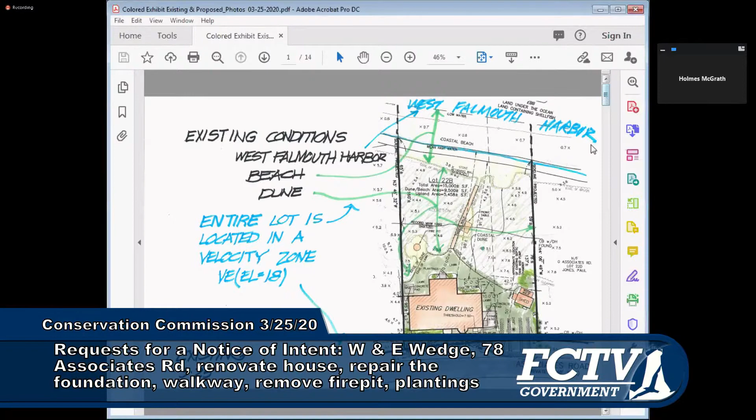There's an existing shed located on the north side of the lot. I'm sorry, we should have put a north arrow, but so be it. The next exhibit shows the activities that are going to occur on the lot, so I'm going to start describing them from the top down.

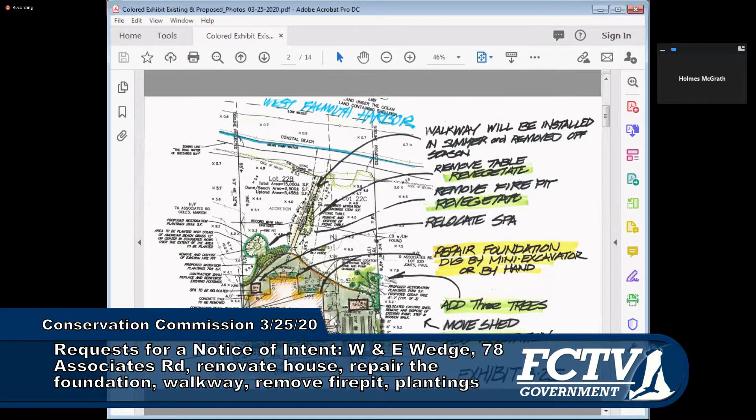There's an existing walkway made out of wood that basically goes from the lawn out to the dune. It's currently installed and stays there, but we're going to change it so it's installed in the summer and removed in the off season, stored on the upland. There's also unauthorized clearing at about this location, and there's a picnic table there, which we're going to remove, revegetating this with dune grass. This plan also shows in dotted lines an as-built from a previous activity, the outline of the path that existed at that time.

Since it's actually filled in on this side, and like I said, there's a picnic table here, so we're going to remove it and revegetate. Then on the other side of the lot, there's a fire pit installed in dune vegetation that's been cleared, so we're going to remove and dispose of the fire pit and revegetate in this area.

There's also a spa that we're basically going to relocate so that it's on top of existing lawn. We're going to construct a work limit on this orange line that goes all the way around to here, and there's going to be revegetation in this area — dune grass here, and a buffer series of vegetation in this location.

On the north side of the lot, there's an existing shed located in this position. We're going to rotate and move the shed, then replant or revegetate this area that I'm showing with the cursor. We're also going to add 3 trees, shown as the heavy dots.

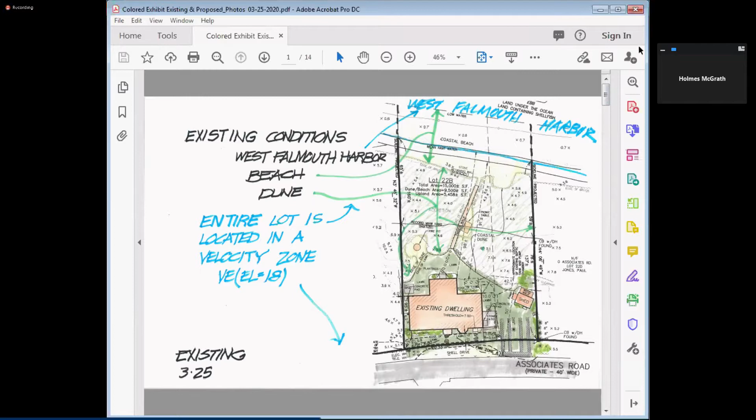Thank you. I guess the only thing is probably mark on your drawing where the tree is going to be moved to. Other than that, I think it looks great. I think you're doing a good remediation of this property. Okay.

Maury? Okay, can you hear me? Yes. Okay. The mini excavator, I like that idea, that it's going to be something small and or by hand, because there's not a lot of room back there.

But I did have a couple concerns that they haven't really spoken about, the picket fence and the stockade fence that are all new in a V zone. I just want to know, I know they weren't there before when the septic was put in, whether we are all okay with that much in a V zone or not. Usually we don't allow that.

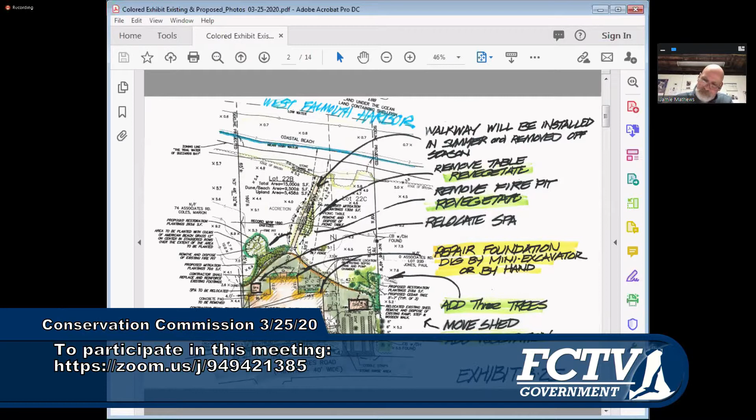Betsy Gladfelter, aye. Courtney Bird, aye. Matthews, aye. Mark Gurney, aye. Maury, Carlo Hawks, aye. Peter Walsh, aye. Russ Robbins, aye. Steve Patton, aye. All right, the hearing is closed. Thank you, Michael. Thank you.

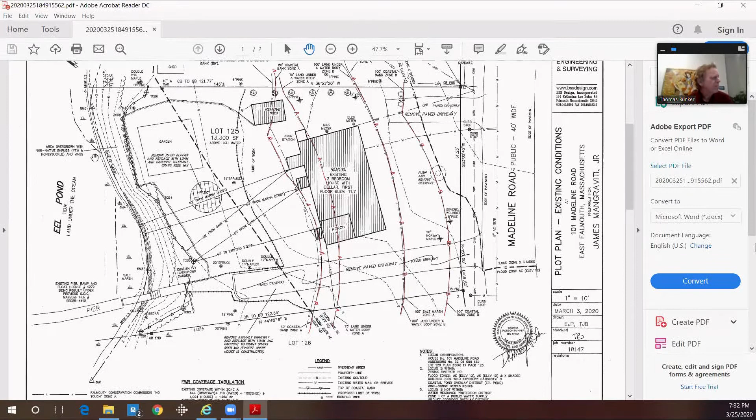There's some fronting salt marsh along here and a fairly steep bank running up to about elevation 7 or so. From there back to the house, about 50 feet, is a lawn area with a garden and patio. Within that 50 feet, fairly close, is a paved driveway that runs from Madeline Road all the way down the hill to fairly close to the top of the coastal bank. There's about 20 feet to the top of the bank. There's also a pier—if you went out there, you'd see some work being done on it, previously permitted under an earlier DEP file number.

I've highlighted the Zone A lines of the coastal bank. The first one is 50 feet out, and then there's 75 feet, land under water body Zone A. Landward of the house is the Zone A, 100 feet from the salt marsh. Further inland, the furthest reach is the Zone B of the coastal bank, which reaches almost to the road, as you can see. The flood zone is this heavy dash line crossing Madeline Road.

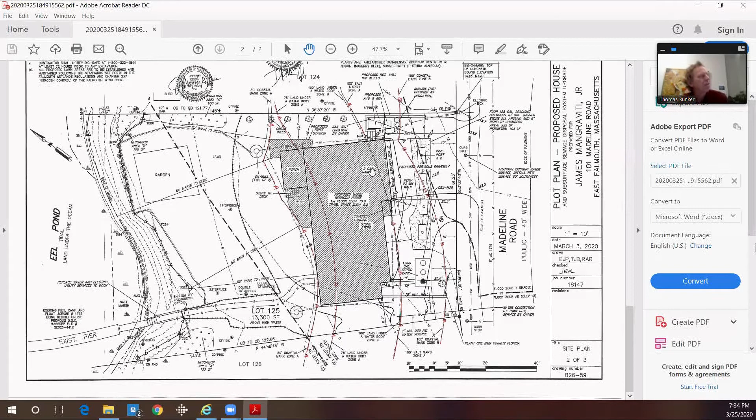The proposal is to take that house down, as I explained, and put up a new house, which is here relative to the Zone A of the coastal bank. I had drawn in what I called the C line. The A line is the Zone A, and the B line is the Zone B, but the C line is a compilation of the A line and how close the house is from the resource areas. This C line is what I figured was the closest any part of the structure could be to the resource area, and so I did not take the shed into account on that line.

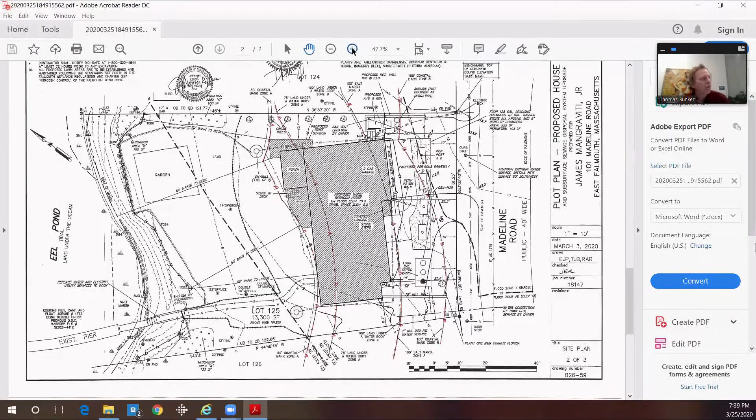All of the roof runoff will be contained in dry wells. We have this roof drain line from the front. The dry wells have to be in the back because they have to be 25 feet minimum from the septic system, so we put them down here. The soil is quite sandy, so the dry wells will be quite effective.

I can show you a couple of pictures.

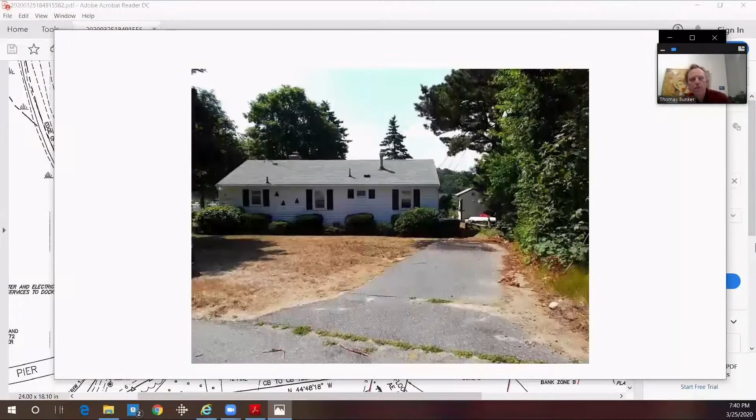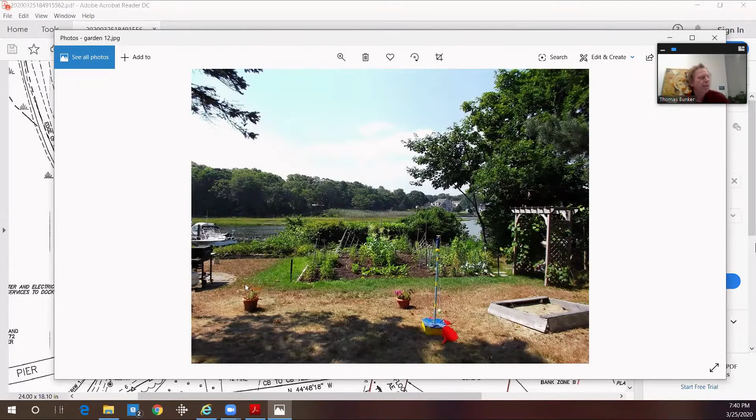Just to go through a couple—that's the front of that. These pictures were taken a while ago, just to show historically how it's been. This is the garden they have now, and you can see it's not a lush green lawn that they tend in the summer, but there is irrigation in the garden.

In your staff report, there was a comment about this arbor that's here. I didn't feel at the time it was important to put on the plan because it's not being moved. You can see some stepping stones near the arbor that go around the garden, and the patio, which is being removed.

And this is the arbor. You can see it as it is now, and the stepping stones.

I'll put this up as a suggestion for how we can change the mitigation planting. This is the area that was originally called A—no, this would be up in the northwest corner. Previously, some mitigation planting went further back inland. So what we will offer to do now is bring that all closer to the bank. If I can get back to the photos.

So this mitigation plan, we hadn't proposed it here before. We see this lawn area and the stepping stones. In this area, you can see the daylilies are starting to come up. This will all be mitigation planting, the lawn area behind the arbor and up through here. This will be maintained as a garden, so they can walk around or step through it. But this area up to this wood edge will be mitigation planting, so it would not look like this, where these green dots are.

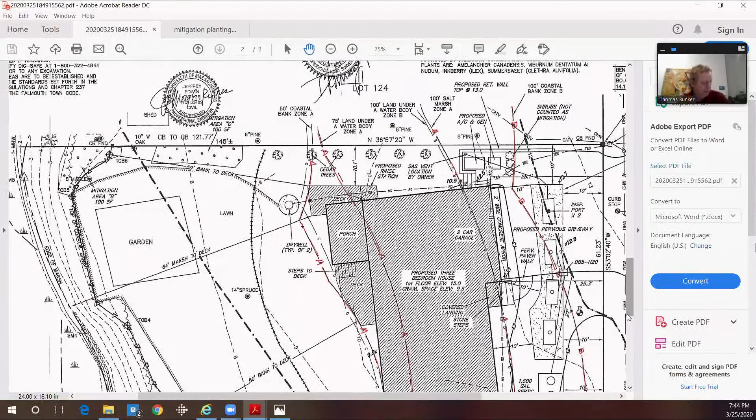That is what they're proposing, what we've drawn, and I'll take questions and comments. Thank you, Tom. Jen?

Yes, Mr. Chairman. Tom, that first comment, if you look at where you have TCB4 and TCB3 near the dock - the railroad, oh wait, maybe the railroad ties are over by the garden area. Because it looked like one part of that bank had no vegetation right to the top of the bank. So instead of relocating all the mitigation to that back corner, possibly put some vegetation along that bank to stabilize it and try to fight off the poison ivy.

It looks like it's lawn right to the top of that bank, and the mitigation regulations are to enhance the resource areas, not smush all of the mitigation, for lack of a better term, into these corners of the lot. We've been seeing this a lot more lately. Not impressed with the fragmented areas of mitigation, and it's just so that it's not along the top of that bank. I just feel the mitigation would be better off where you almost have like TCB4 through TCB3.

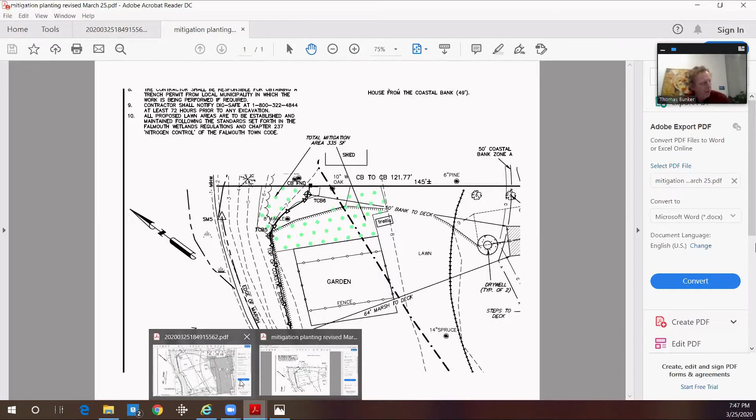Kevin, did you have any additional comments on this one? Yes, Tom, I just had a question on the pervious paver walk, what that would consist of. Which walk? Over near the septic. Oh, that. Well, I guess there's several types of pervious pavers - some are just formed with a gap between them to allow water to flow through, but there are some that are termed pervious.

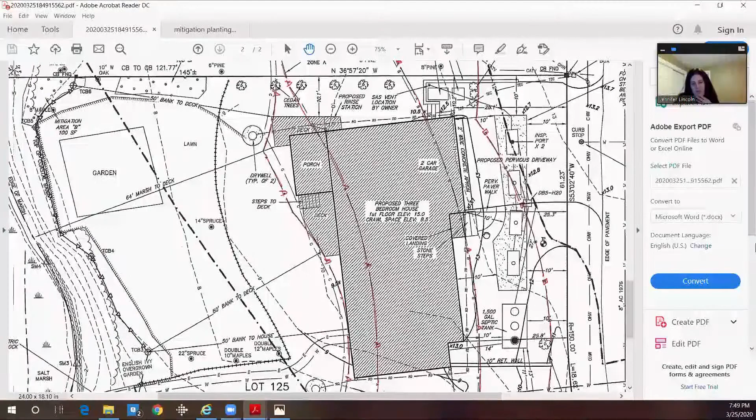We can make that decision subject to your approval, but I was considering it be the pervious type of paver that would have the gap formed between them, that would flow down into the sand, the drainable material beneath it. Okay, thank you, Tom. I just wanted to bring that up for the board to consider. And you're not proposing to mitigate for that pervious paver area, are you, Tom? No. That's it, Mr. Chairman. Okay. Comments, Betsy?

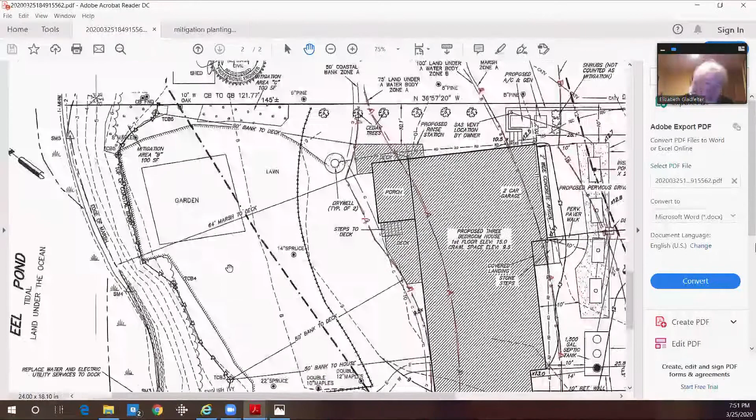Well, okay, I won't comment on that. But also, if you were to move the mitigation from that top left corner, your cedar trees could move further northeast also. Your cedar trees could be moved closer to the resources.

That's all. Those are my only comments. Okay, Courtney? Yeah, I have to agree with Betsy. I think this is a good time to tackle some of the invasives, the English ivy, and to rethink where that mitigation is going to go.

The other question I have for you, Tom, is do you think that just 2 dry wells is going to be adequate to handle all the roof runoff? I think it will. It always depends on what size storm you're looking to protect against.

What are those, just 2-foot dry wells with 2 feet of stone all the way around? Yeah, 2.5 feet diameter and 2.5 feet deep, with 2 feet of stone. In sandy soil, it'd take quite a bit. I can take a second look at that. Probably doesn't hurt to make them a little bigger, that's all.

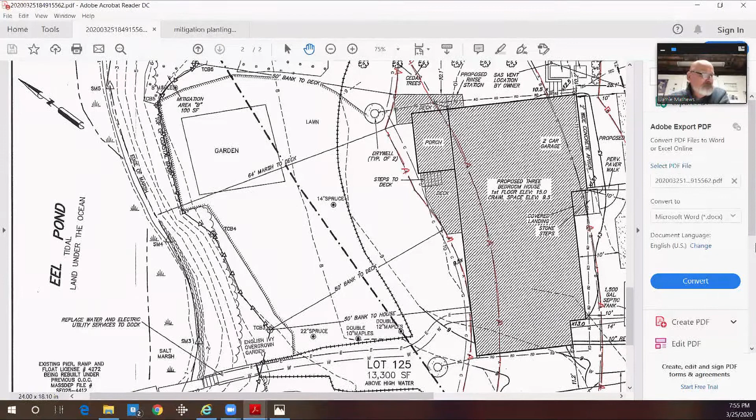I was just curious about the driveway. I'm unclear where the parking area is and the drive. It comes into that garage there, but is it the full width there? Yes, it's the full width. It's two cars wide, plus another little area up here, almost 3 cars wide. And then it's grass around the generator and all, but it's basically a pervious gravel surface up here.

Okay, it wasn't clear to me. Thank you, that's the only question I had. Thank you.

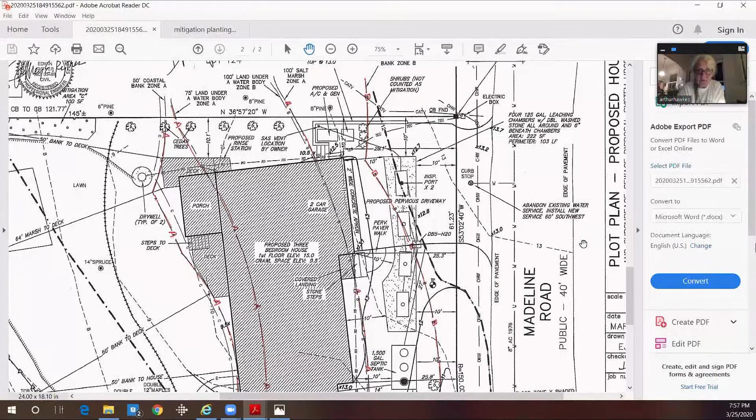When you were talking about moving the cedar trees further from the property line, then we're bringing them almost 10 feet, if that, to the house. And we usually don't allow mitigation or anything within 10 feet. And I have to agree with Betsy, I think the trees need to go down toward the coastal bank, and all the mitigation needs to go down there.

And I have a question for Tom. It says 333 in the A zone and 333 in the B zone. I just want to make sure I only see on the plan the 333 square feet in the A zone, which are the three little pockets of 100 each. So I just want to make sure we're getting 666. No, you're getting 333. Talking about by zone, in zone A, there's 111 square feet of increase. There's 333 square feet of planting.

So I have on my plan 133 square feet, 100 square feet, and 100 square feet, which comes up to 333. Total. And then you also have to, it says on the plan that you're mitigating for 333 in the B zone.

Where do you see that? On his mitigation calculations on the top of the plan. It says mitigation provided 333 square feet. That says 0 for the B zone. First it has the calculation for the A zone, which says 111 square feet times 3 is 333. Then they list the impervious area in zone B, which is the 0 increase. So it's a total of 333.

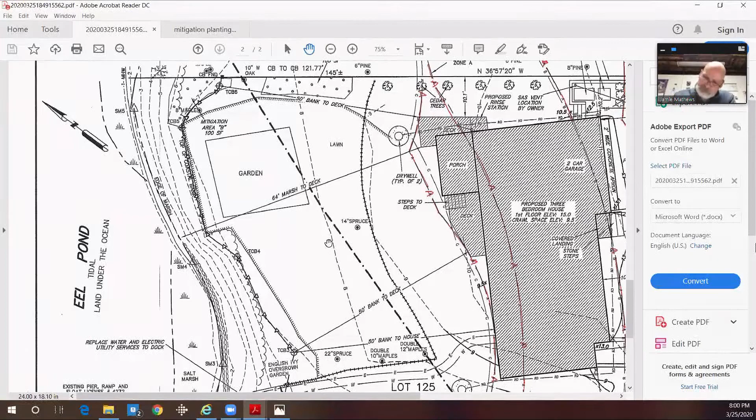Thank you. Tom, where's the dogwood going? It's up in the front yard, it's in zone B, up by the septic tank. That's where one of the trees came from. That's why I didn't see it. There's a Norway maple came out from there, and dogwood goes in.

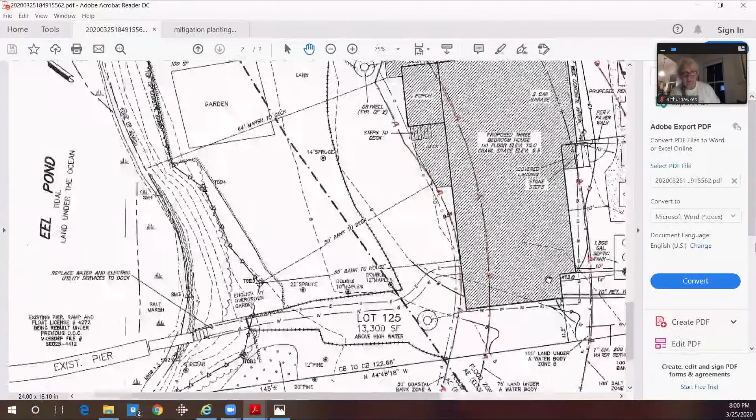Okay, any further comments from the commissioners? The only other question I did have, Jamie, the edge of the grass on Tom's plan is a little teeny, like hairlines. Am I correct? Yes. This line, that's the existing edge of grass here. Is that what you're asking? My question is, what's behind it? And in which location?

Where there's nothing shown, pretty much up to the north of the garden. Well, right in this area, north of the garden, this is where I said there's some honeysuckle right here, and there really is. It's kind of, I wouldn't call it a lawn. It wasn't located as lawn, but it's a grassy area through here and down on the bank. It's kind of a bare area where I showed mitigation area B, just kind of shaded by honeysuckle or whatever. There's basically not much, there might be one or two small honeysuckles in there, but basically nothing down in that corner.

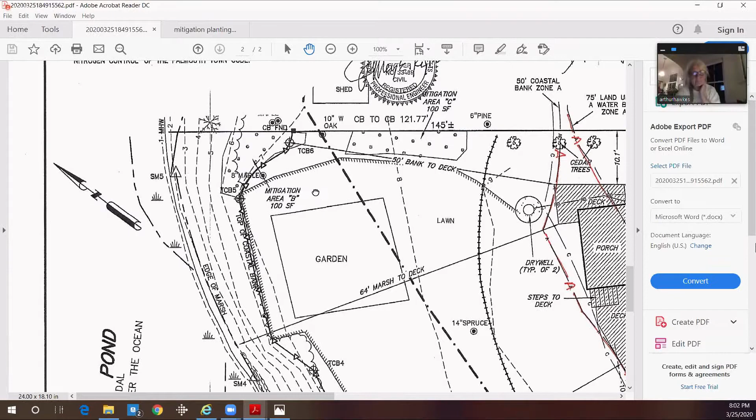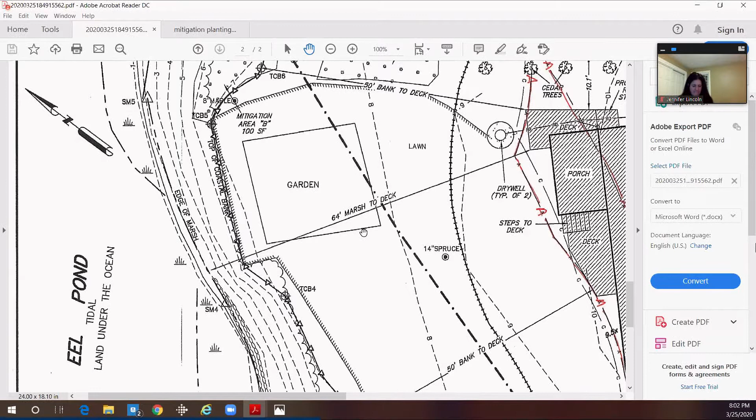Thank you. Okay, Jen, do we have any public comments? I didn't see anything in chat. There's nothing in chat. I do believe the applicant has been moved up as a panelist if he wanted to make a comment. If not, Mr. Mangravetti, would you like to comment? You don't have to.

All right, Jen, are we gonna need a new plan for the mitigation? Oh sorry, this is Mr. Mangravetti, no comment. Okay, sorry, putting on mute, guys. Thank you, thank you, sir.

Tom, we're gonna need a revised plan for your mitigation. You probably want to consult your client. Our next available hearing, because we had to move all of the hearings from last week forward, would be April 22nd. Give me a moment to consult. Through text, absolutely, yeah.

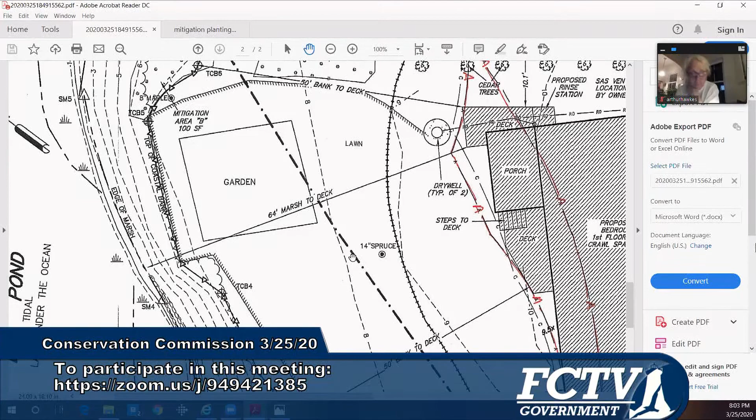So just to make it clear, we're gonna move the mitigation closer to the coastal bank along with the cedars, because they really can't be moved closer to the house. I think that's what the discussion was, Maury.

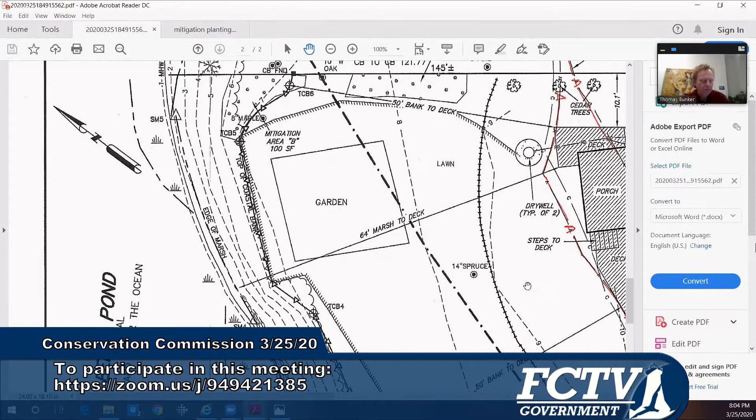Are we waiting, Tom? Yeah, one second, may I. Yeah, I guess April 2nd, I wish, April 22nd. Yes, I'll request a continuance. If I could put you earlier, I would, but no, I know. Weeks are going to be very long in this format.

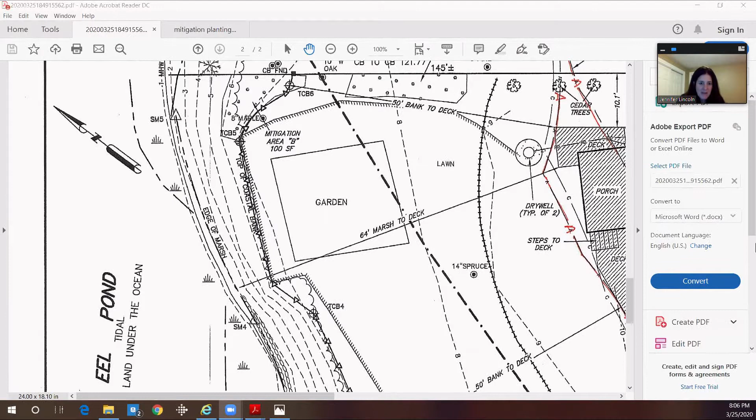Next up, Michael and Carla Follick, 12 Uncatena North, West Falmouth, Mass, for permission to reconstruct a licensed timber dock and piles and repair an existing concrete walkway on top of an existing licensed groin. Mr. Borselli, I understand this is you. He's being moved up as a panelist now. Excellent, thank you.

Okay, I think I have unmuted myself. Yes, hi Mike, hello. Now I have to see if I can share my rendering with you. Aren't we all glad we did this practice? Can you see my rendering now? You're coming up, there you are. Okay, yes, so I'm going to test by zooming in on it. Is it moving around? Yeah. Okay, great, thank you.

For the record, my name is Michael Borselli from Falmouth Engineering, and I represent the applicant, Michael and Carla Follick. They own the property at 12 Uncatena North, which has frontage on Buzzards Bay.

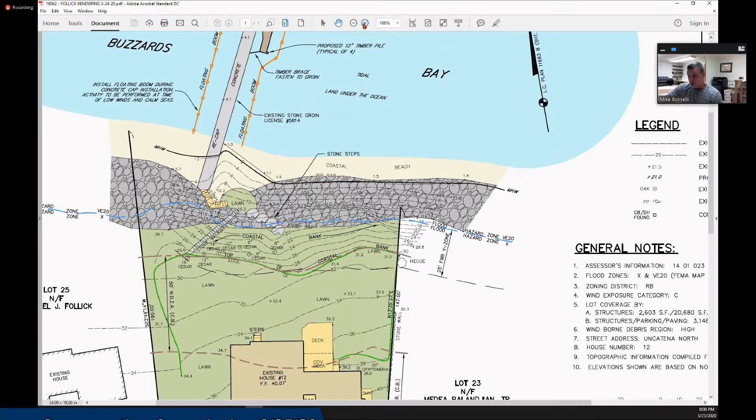The project before you is requesting permission to reconstruct the previously existing timber platform and pilings that supported it, which existed on this side of the stone groin until mid-October. I will try to get a photo up.

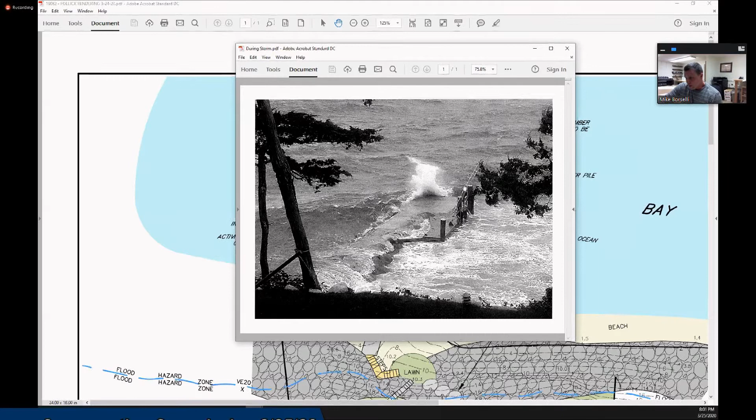In October, there was a storm, and you can see it crashing on the left side of the groin, with the walkway and pilings shown in existence. Unfortunately, they did not remain. This is a photo post-storm.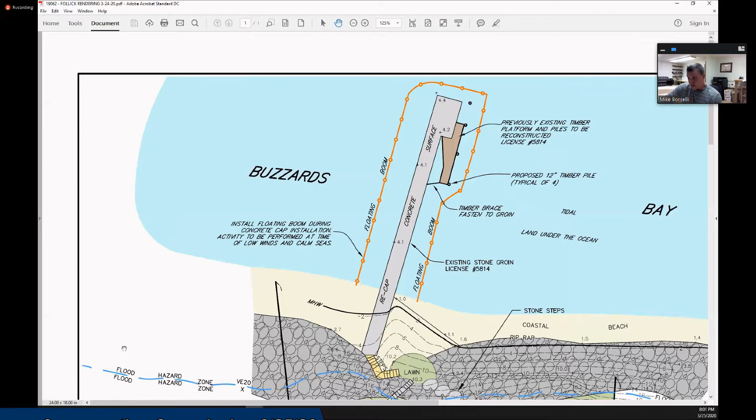Prior to that storm, the structure had existed for decades, as long as Mr. Follick owned the property. The fasteners connecting it to the groin and the timber pilings had become deteriorated, losing their strength. It had not been maintained perhaps as it could have, and it got washed up on the coastal beach in this area.

This is a completely licensed stone groin, platform, and pilings, license number 5814, provided in the application. The plan is to reinstall the pilings and rebuild the platform in kind as it previously existed. Ben Carson of William Schultz and Company is the contractor for that work. The only work that cannot be done from the upland, and must be done by barge, is installing the pilings.

The second activity we're requesting permission to perform relates to the concrete cap on top of the stone groin. I will show you that in a photo. The resolution isn't very good, but you can see as it exists on top of the stone groin, it's crumbling and broken and in an unsafe condition for walking.

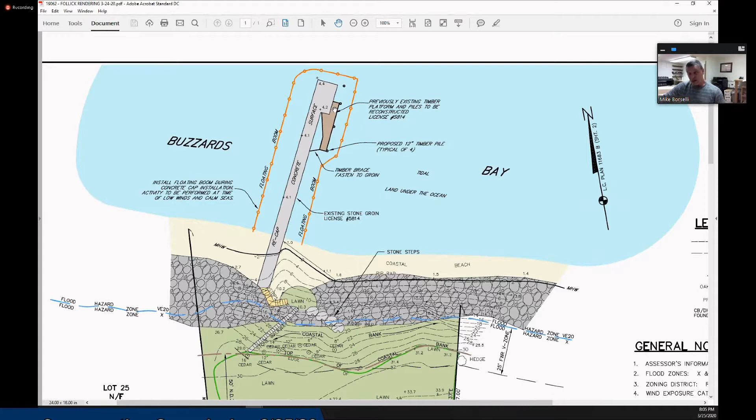So in summary, we're basically trying to maintain the licensed stone groin surface and reconstruct the licensed wooden platform, supported by timber pilings, in the same configuration as it previously existed and as it was existing in accordance with the Chapter 91 license. With that, I'm happy to answer any questions.

Thank you, Mike. Jen and/or Kevin? Yes, Mr. Chairman, I don't have any questions. My only comment was it was very helpful for your client to take those pictures during the storm so we could see what it was like. So that was helpful. And anything from you, Kevin? No, I don't have any comments on this one. Thank you. Okay, I'll be looking for comments.

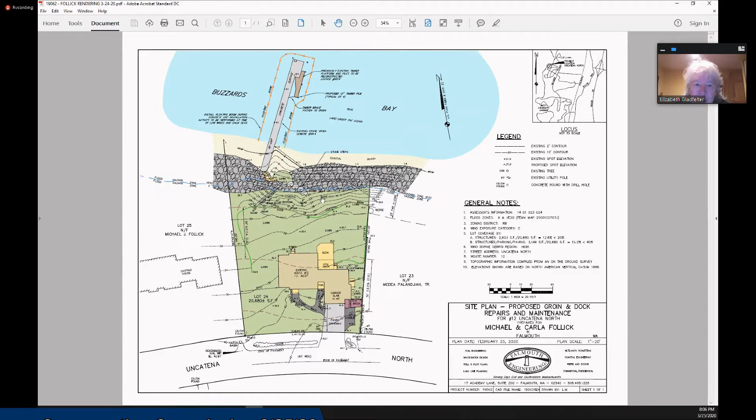Betsy? Thanks, I have no comments except to say going down that walkway to the stone pier reminded me of walking along the Cornwall coast. On this area. Yeah, it was fun.

Courtney, are you pulling out the old concrete on that cap, or are you just going to go over it? We're going to pull out all the loose sections, and if there's any section that is still stable and solid, that would remain. The sections that I remove would have to be hand carried, or we may temporarily stage the barge since it's easier to move the pieces horizontally instead of vertically up the hill. We'd like to reserve the right to be able to do that.

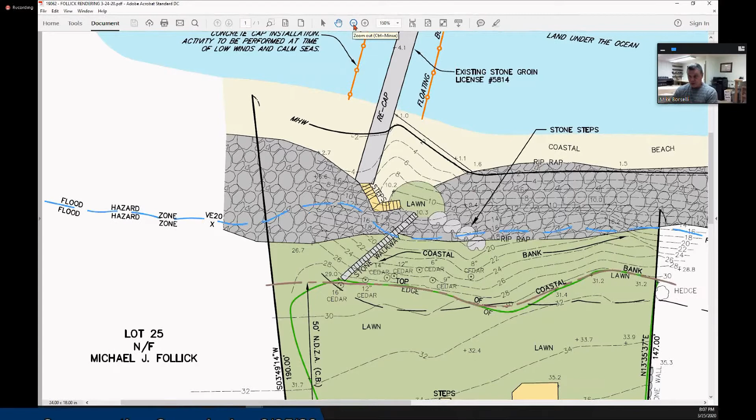What are you going to use for fasteners? Are you going to try to use stainless, on the timber? Yeah, if that's a recommendation, we would either use stainless or galvanized steel, hot dip galvanized steel. I just think in that environment, given that you don't want to have to come back and do this in a few years, probably stainless if you can afford it.

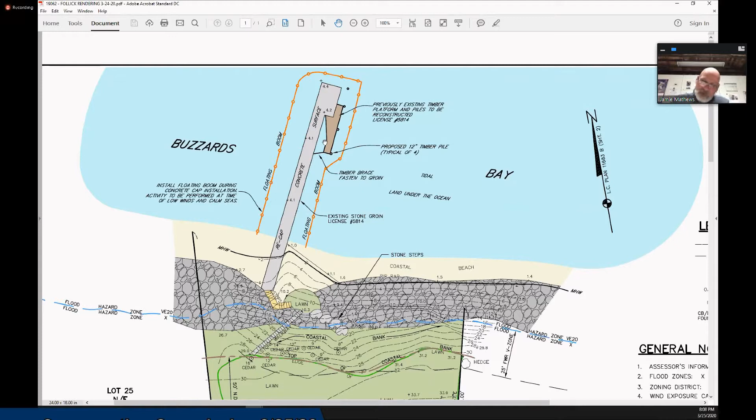Do you know if there's any work on the sides out at the end of the pier? In other words, concrete work. If you look at the photographs, the wooden part is completely gone. If you look, right there at the end, you're almost on it there. Do you need any concrete work there, do you think? No, actually, we're going to do the form right on this edge on the top surface and run it around along this edge. Since the new timber decking will be installed flush against that, there's no plan to do any concrete work on the side.

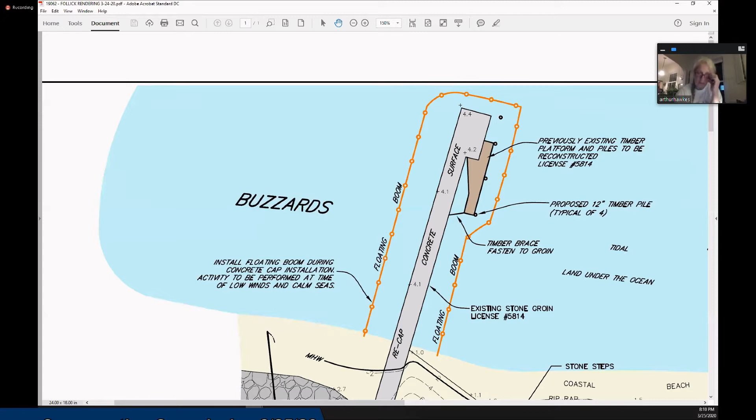The other thing I was curious about is I noticed on your plan you didn't put any eelgrass, and I think there's eelgrass, not just land under the ocean. There's eelgrass out there, so I think that should be on the plan. That brings me to the time of year restriction and how you would protect that boom. I'm sure you're going to try to get this done as quick as possible, but if bad weather comes, the storms already ripped four pilings and a dock out, so that boom could just be somewhere and not there. I'd love to know what happened to all that debris.

I'll comment on the boom first. There's notes on the plan and in the narrative, and the contractor is fairly seasoned, and it would not be in his best interest to attempt the work without proper weather conditions. The floating boom and the work on the groin that requires the boom as mitigation will only be done with a forecast calling for low winds and calm seas, not just for one day. He's going to have to plan around the weather for that or put the activity off. Same with the pile driving, because if the seas aren't calm with the barge, it would be more complicated to do it. That's how the application is proposed.

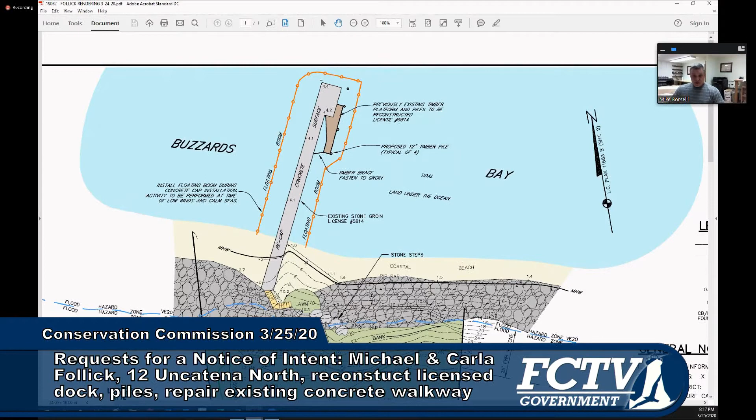Thank you. Okay, so we have closed the hearing for 12 Uncatena. Thank you, Mike. Thank you. I appreciate you still proceeding with business and trying to be as normal as we all can be. And I hope you all stay healthy. You as well, Mike, thank you. You too, Mike, thank you. Thank you, thanks Mike.

We're trying. We're doing well, we're getting the voting down good.

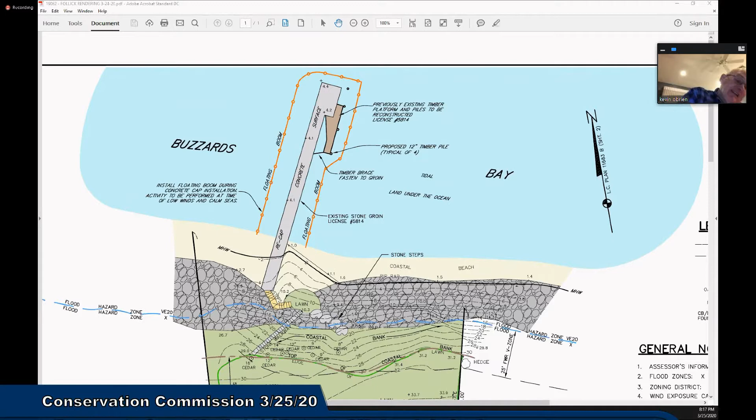Okay, next up are continued requests for a notice of intent. First up is Delcor Realty Trust, care of Joanna Delapa, 418 Minot Road, Falmouth, Mass, for permission to replace and extend the existing pier.

Jen? Yes, Mr. Chairman, the applicant did request a continuance late today because of the revised plan that came in today. So they are acceptable to a continuance until April 22nd. And the revised plan is for the clarifications we were looking for, correct? They were, but staff did not have time to review the plan to make sure anything else was changed, not saying it was, but we do like to clarify, and we just didn't have time to do that. Fair enough, we're at the mercy of their surveyor, so.

So I move to continue to April 22nd. Second. Who seconded? Courtney? Yep. Okay, so we have a motion and a second to continue until April 22nd. Jen, is there anything we can do so that there are no more continuances and no more last minute plans?